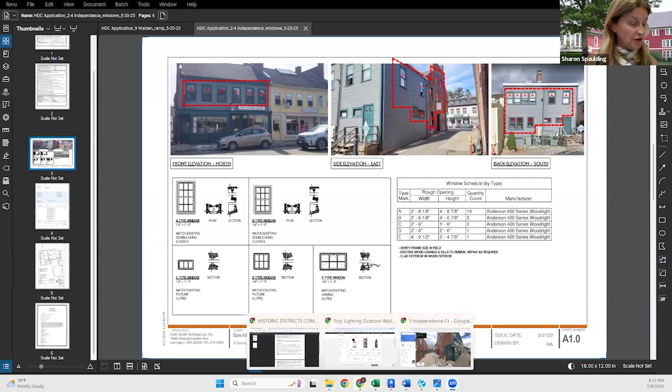In the winter, it's uncomfortable. Over the years, we've sort of done everything possible to repair these windows. We do feel like this is what we need to do. It was precipitated when the work at Vanderhoof's was approved by the commission, so we're following this scope and precedent that was set for them.

So I think from there, I will let Colin give any more details in regards to these. I guess the only thing I would add is that this would allow us to remove the storms, and then you'll be able to read the divided lights a lot better now on these new windows. So it's a full same size replacement. Correct, yeah, so it won't have that issue.

We have window people on the commission, I am not one of them, or at best one of their lesser members, but someone else feel free to pipe up. Usually, so what will go in there will have the same amount of light, same amount of glass space. It's not going to be reduced, or the replacement frame isn't going to be a different dimension or anything like that. Correct, it's not a frame within a frame.

Okay, same muntin width, and then we would like to remove this fat storm window frame here and the storm window itself. So it becomes a full removal of the complete window, replaced by 6 over 6. Yep.

Just to make sure I understood, so the outside framing, which is quite intriguing detail there, will remain. The casing and the sill will remain, correct. Thanks, yep, the sashes and the window frame will be replaced. So a reasonable person would never know the difference. Thank you.

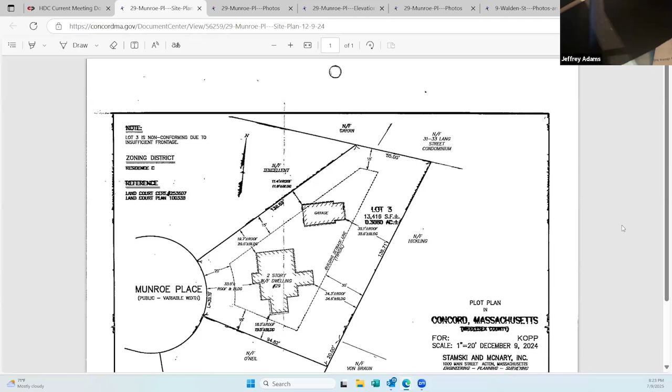Thank you. And nothing from Lang Street? No, not really. It's again very difficult to see, there's a great deal of foliage. I was there again today and I actually couldn't see Lang Street from the backyard. Yeah, you can't see it.

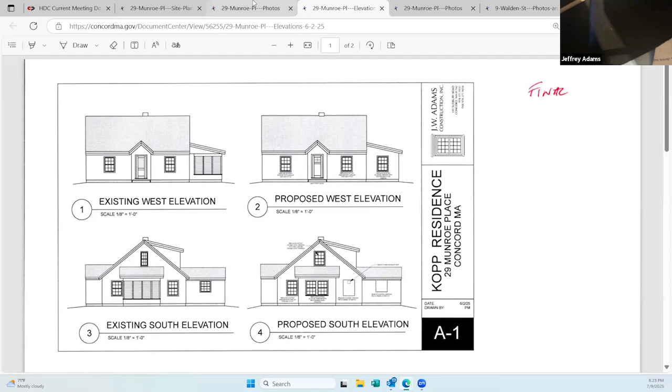So on the existing front or west elevation, the intention is to install a new door, and we've submitted the design of that, we can look at that in a minute. And to change the two existing front windows to the exact same size double hung Marvin windows that are wood sashes, very similar to the Anderson windows you just approved. These have a fiberglass type coating similar to the Anderson windows on the outside that's paintable, and that's our intention, to paint them trim color.

On the far right side, on the west elevation, we'd be removing all of the jalousie windows and putting in matching double hung windows. The exterior wood casing will be new wood and the sill will be new. Our intention is to remove the existing triple track aluminum storm windows on the existing double hungs.

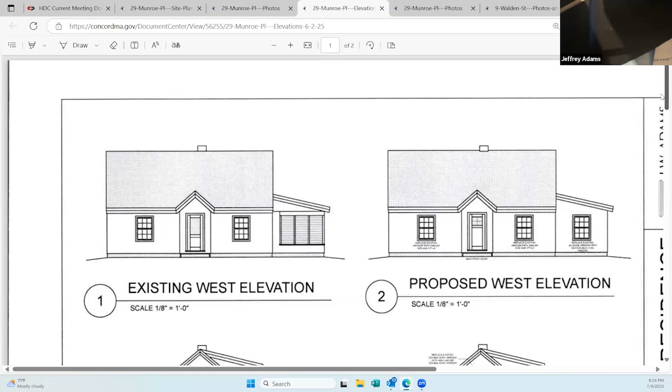If we scroll up a little bit and look at the right side of the house, or the south elevation, you can see the jalousie windows on that bump out on the left, and we'd be changing those to 2 double hungs. In addition, just to the left of that is an existing window, again to be changed to the exact same size double hung window.

On the right side, which is really not visible from the street, we would be eliminating a kitchen window. The kitchen is really quite small, there's only space for a counter on 2 sides, but it's very challenging to make it work with a cooktop and whatnot, so we'd be removing 1 window. Then in the back, there's a very small mechanical room, mudroom area, again not really visible from the street, and we'd be removing the window in that space to make it a more utilitarian space.

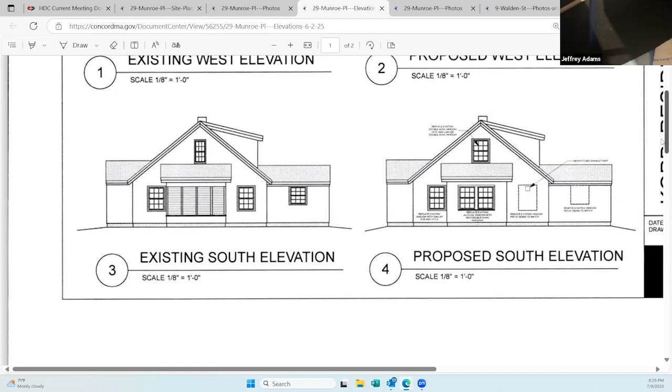If we scroll up to the rear elevation, the change here on the left is to remove the jalousie windows and door and install a conventional French door on this rear part of the house. On the rear dormer, we'd like to add a skylight above the staircase, which is an internal staircase without any natural light - again, that's not visible from the public way. We'd also be removing a window on the rear in the far lower right-hand corner, again to allow for a bathroom.

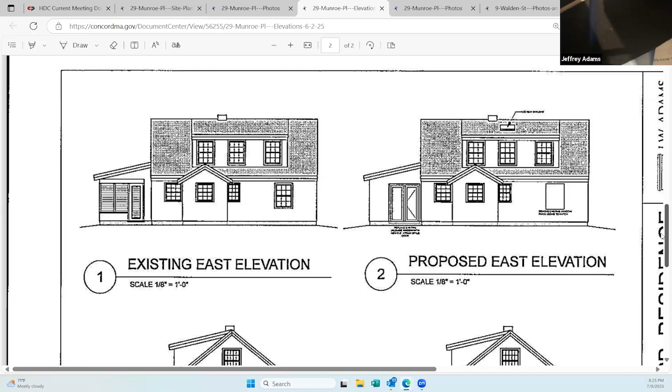Scrolling up a little bit to the driveway side, the change is to install a new door to the mudroom. It's the exact same 6-light door, but it's new, wood door. And on the right side, we'd like to remove the existing double hung window and replace it with 2 narrower double hung windows to match the glass size of all the other windows, but to allow for some headboard space in that bedroom.

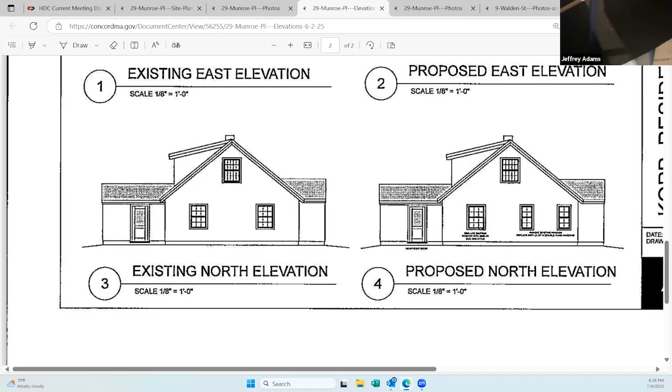So that's the crux of the changes. We've also submitted the paint colors, and we can offer any feedback about that or any other technical questions you might have. Thanks, Jeff, that was very comprehensive.

What are the paint colors? Yeah, that was my question. Okay, oh, that was - turn to that, excuse me. You're kind of doubling down on that blue, is that it? No.

Paula, while I pull that out, here they are. Yeah, I can offer some feedback and then talk more specifically about them.

The house color would be called Bruton White, a very light tan color. The trim would be Swiss Coffee, a cream color. The door would be Stardew, which doesn't look quite right on screen - it's a light blue, though currently it looks reddish, almost a red door on a blue house. It's colorful as it is.

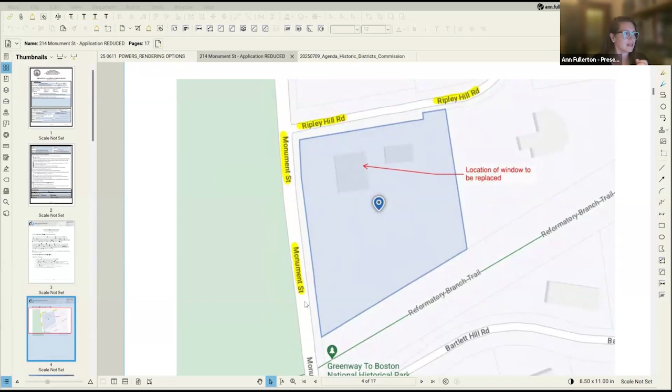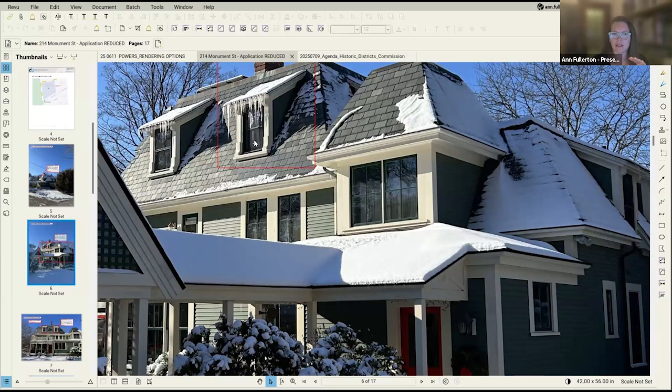To give you a bit more detail, this is the view entering their rear driveway. Most people enter from their front driveway; this is their private side driveway. So it's this window tucked back behind this stairway mansard roof. Here's another view of it. The window next to it is actually a historic window, so this Harvey one is the only one of issue. If we can answer any questions, we'd be happy to.

Sure, thank you. Actually, I remember this application and the Harvey window being singled out the first time. It's great that even for this one you're going with the proper Bostonian windows because those really look good, and I appreciate the Hokes working on the original windows. Just out of curiosity, any idea why that one needed to be replaced? Was it an earlier roofing issue or something like that?

It was prior to their ownership, so we really have no idea. They bought the home around 2003, and it was there when they purchased it. It was a cannonball from the North Bridge battle. Oh, that was it, went right through. Yeah, I just didn't know if it was a roofing repair issue we should know about or anything like that. But any questions from the commission?

No, seems straightforward. Okay, for public comment, any neighbors or passersby? Questions, thoughts, comments? No, okay. Back to the commission.

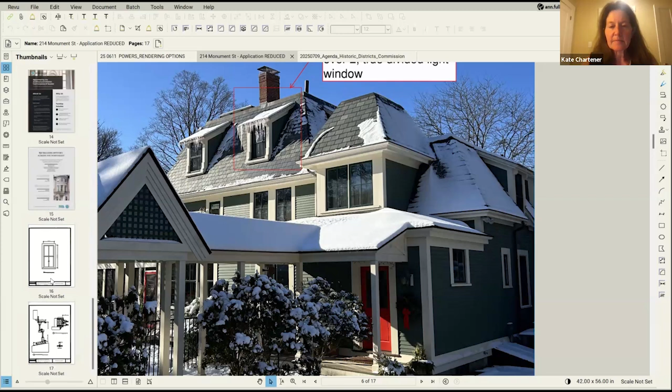Does anyone want to see, do we have a cut sheet of this window? Does anyone feel the need to see that? We do have a cut sheet that was part of your package. The muntin is approximately the same style and size as the originals, as close as possible as we can get. This section isn't specifically for our project; it's the proper Bostonians' typical section, which frankly this window type is used a lot in Beacon Hill. So this is a masonry installation detail.

What is of note is that we will be putting in two new sashes and really just the jamb liners. The rest of the window frame will remain in situ. The Harvey window was a replacement, so we don't have to touch anything from the exterior; we just have to pop it back out and use the original frame. The original frame, or the Harvey frame? The original frame, because the Harvey frame was a replacement window, so it had the filler frames on it. Right.

All right, thank you for that detail. Anyone, any other questions, or are we ready for a motion?

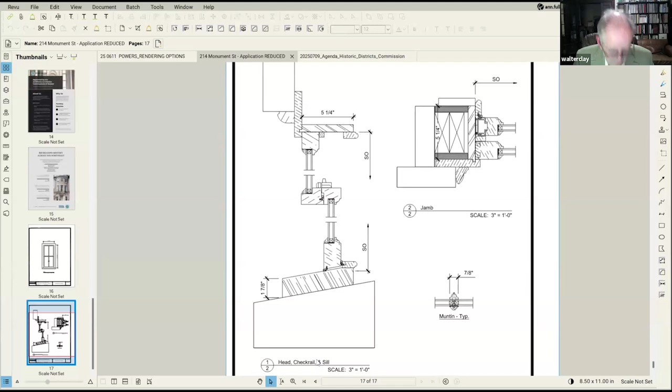May I have a second? Second. Thanks, Walter. Melinda, aye. Bill, aye. Lewis, aye. Walter, aye. And I am an aye to approve the window replacement at 214 Monument Street.

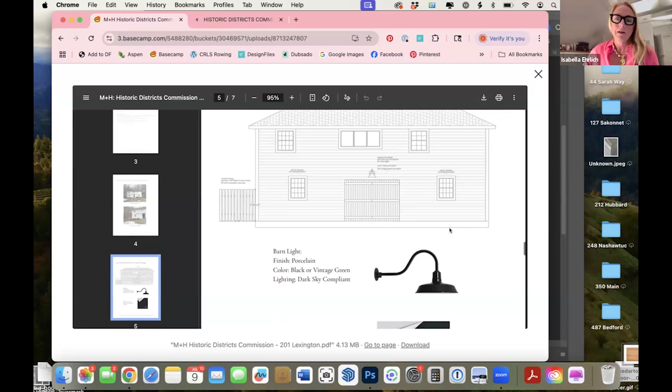Here you can see the piece of privacy fence that we would be building, custom-made to be as innocuous as possible, and adding a light over the doors, either in black or dark green. I like these lights because they're dark sky compliant, they don't shed light laterally, only downward, for accessibility and safety. We have two options, either black or green, depending on the commission's preference.

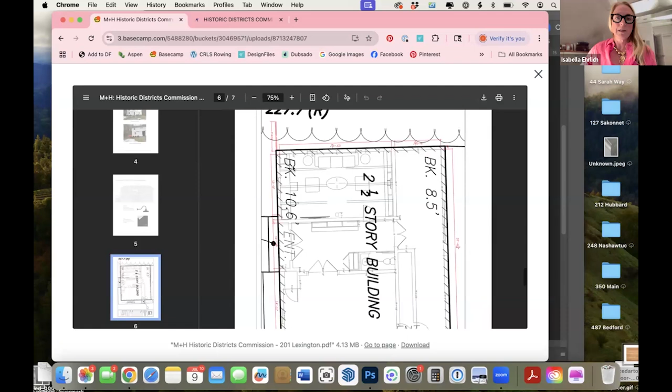So you can see in this section, let me zoom out a little bit. This is the front, the barn doors, and this is the piece of fence, and it is 5 feet.

So I will now show you a mock-up, very close in. We had proposed either natural cedar, or we can do it in a dark green. That would be a piece of fence, very similar.

The only intention is to hide the mechanicals and the garbage cans that are over here. I have mocked it up here in natural cedar from the public way, and as you can see, it's very hard to notice it. I tried to brighten it up just to make it more visible in the mock-up. But that's the piece of fence that would cover the garbage cans and the condensers.

Two options based on the commission's preference, either dark green or natural cedar. We don't have a preference. And then the addition of the barn light at the top, removing the floodlight, which could also be black to coordinate with the oil rubbed bronze hardware, or dark green, depending on the commission's preference. And that's all of it.

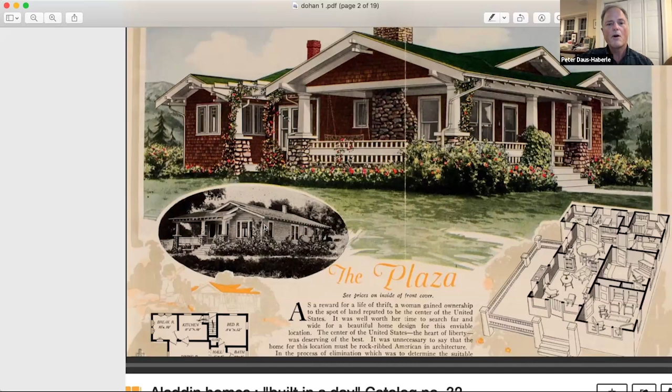What's there now has been replaced over many times over. It's got off the shelf Brosco moldings on the corners and band molding on top. This original house was available in either cedar shingles or clapboard, as you can see in this picture here.

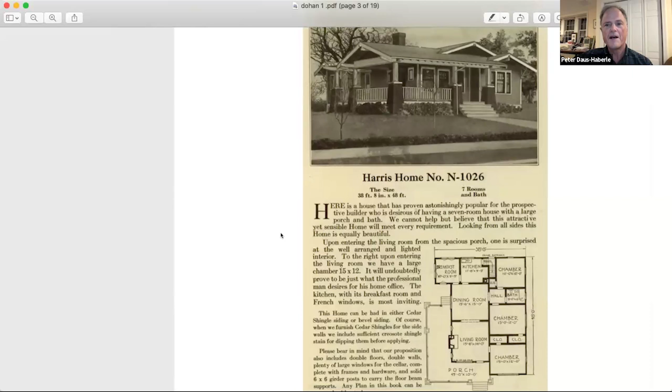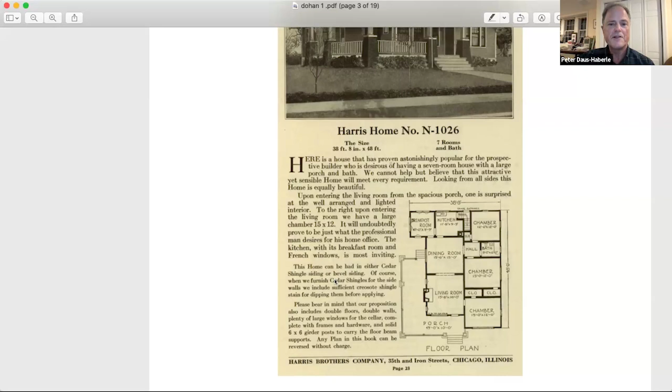So if we scroll down, we find some really interesting things. This is another ad from this house, original ad for this house. And we can see down here, it says this house can be had in either cedar shingle siding or bevel siding. So that's very interesting. This one shows brick bases under the columns.

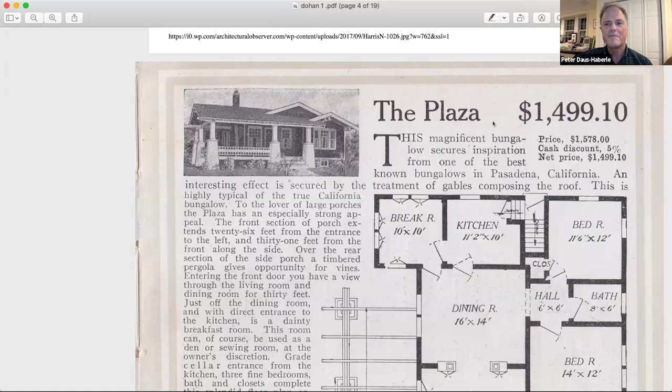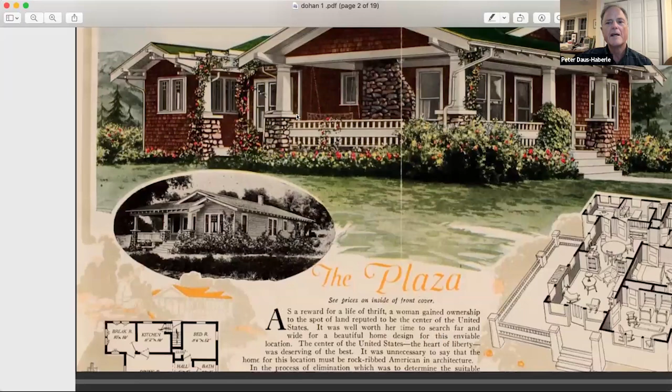And then we scroll down even further, and I think this is the funniest one. You see the price of that house back in the day - $1,400 or $1,500. The original details of the railings are still there. So many things that we can go back to are still on the house, which is very exciting.

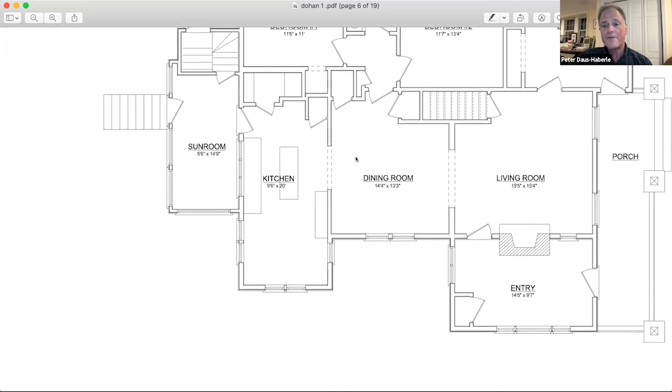But being faithful to the house, really, keeping the living room in the same location, keeping the study in the same location. A big thing for us is going to be to open up the original porch, take off that addition that was done in the 70s and open that back up. And then an expansion on the kitchen a little bit here, and then a back porch here to overlook the backyard, which is beautiful back there because it overlooks wetlands.

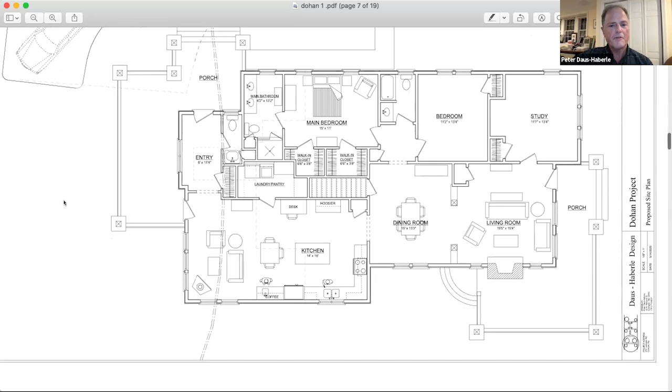I'll scroll back to this picture. I apologize about zooming in and out, it's a little disorienting, but - is Lexington Road at the top of the plan? That's a good question. Lexington Road is right along here. Oh, got it. Okay. Yes, so this is the front of the house. I'm sorry, I went a little bit quick.

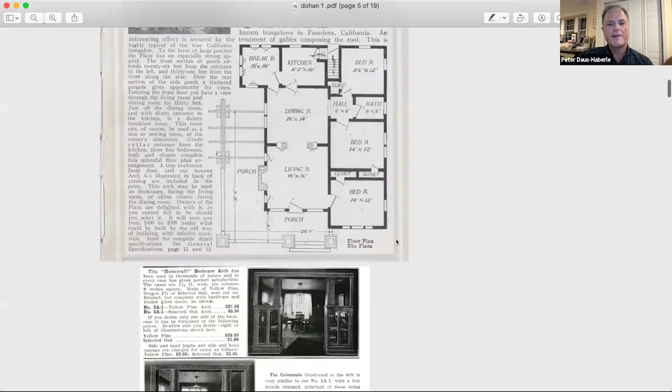This is the front porch right now. Right now, this section of the porch is enclosed, and that's what we're going to open back up. And let me scroll back up to that picture again. I apologize about all this scrolling, sometimes it's disorienting. This is the section of the porch that was open and is enclosed now.

And what they did was they moved the original front door from here over to here, and they closed this section, and they're calling it the entry, which it's not, it's the porch. And then they separated these two windows here, and then they put another door in this section here, which goes into what was originally a bedroom. So it's a little bit haphazard.

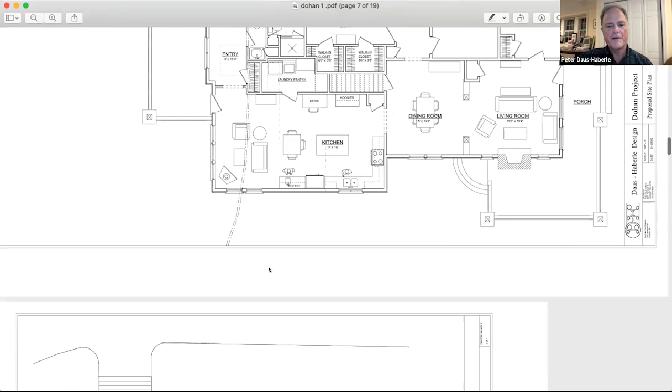So this is a big Andersen casement window, a big Andersen window there, big picture window. So this is the original open porch, which would look like. So let me scroll down to the elevations here. I'm sorry, just to sequence things.

So from public ways, 3 sides are visible, but not the back. Is that accurate? That is correct. Yes, thank you. So from a public way, this side is visible, the front is visible, and this side is visible, and then the garage in the back.

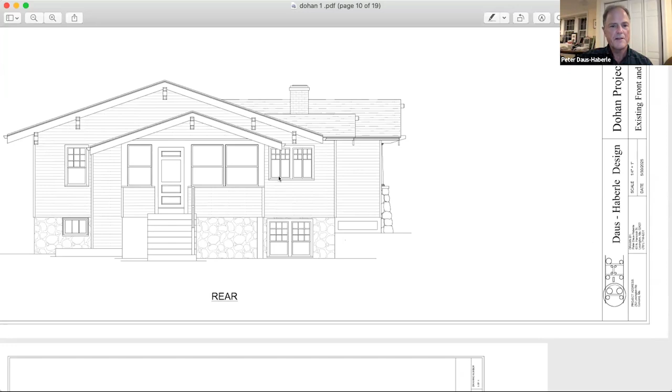This is the existing back of the building, which is not terribly pertinent to us, but this was an open porch and that was enclosed, and so we're going to put an open porch on the back again.

Would anybody like that? Or sure. Yeah, I just okay.

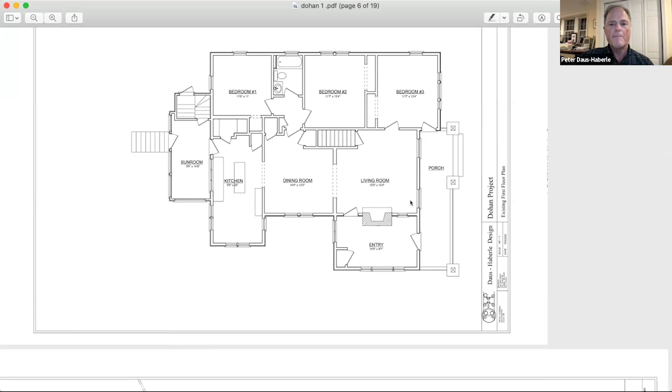So this, I'll go to the original floor plan. So right now this is the enclosed porch, which they are calling the entry, and they had moved the front door from here over to here and split these two windows. So what we're going to do is open this porch back up and then make a

better entry into the back. So there'll be a side porch, a side entry here into an entry in the back, because most of the time people will be driving into the driveway, coming from the garage and into the house this way. And then an open porch so they can look out their backyard, and then an entry that comes here, sort of like a mudroom entry into the kitchen.

The dining room staying where it is, the living room staying where it is, the study is staying, and this bedroom staying. This bedroom gets expanded a little bit. Mm-hmm. So it is a pretty extensive

restoration, renovation. So part of the new back porch will be visible from Lexington. Yes, this portion of it would be visible. Right. Yes, you're correct about that.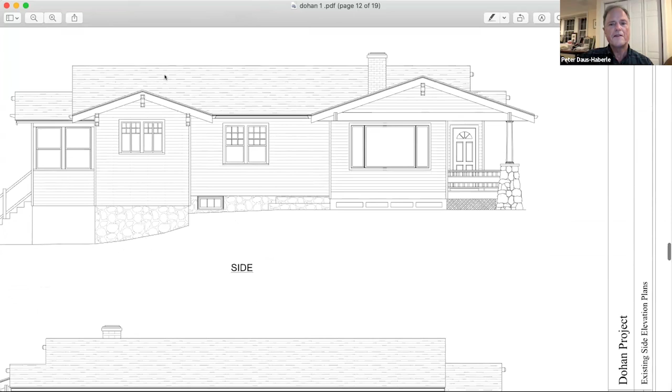So I'll scroll down a little bit further. This is the existing side elevation. We have this huge window here where they enclose the porch, this funky 1970s door that goes into that bedroom, just plain, not even muntin windows, and then just storm windows in the back for that enclosed porch.

And this is the other side, the driveway side, and I'll share some photographs with that as well. And this is a door down to the basement. The property slopes off a little bit here.

And then these are the proposed new side elevations. So we're going to open that porch up again. One of these columns has been removed, and we're going to restore that.

This is the existing foundation, and then we're going to drop down with siding in this area here, and then this is the porch off the back.

Now we purposely didn't do stone columns in the back. We thought about stone columns in the back, but part of the idea was to make this section of the house subjugate to the original house. You know what I'm saying? So that the most important part, what draws your eye, are the columns in the front of the house, the stone columns in the front of the house.

But we are going to go ahead and match the detail of the open rafters, the exposed rafter tails, these beams that come out, these beautiful little details here. We're looking to go from it now has like the standard K gutter, but originally the gutters would have been half round gutters. So we're going to go back with a half round gutter.

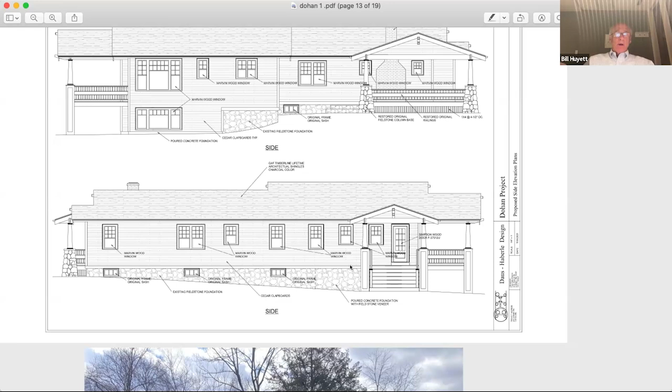Can you indicate with your cursor on that side view where the existing rear is, and how much are you adding? Right now the rear comes to about here, and the enclosed porch is right here. Then there are steps coming down, a big row of concrete steps.

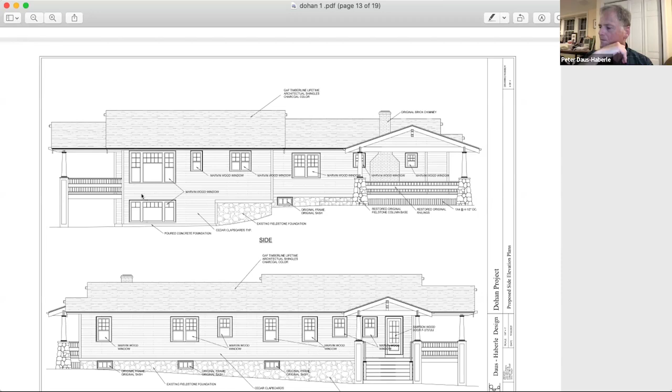We're adding roughly 300 square feet to the house. That number does include the porch. Part of that is that we're taking away some square footage by opening this porch back up and making it open, which balances with the addition of the back porch. So there's not a lot of added square feet right now.

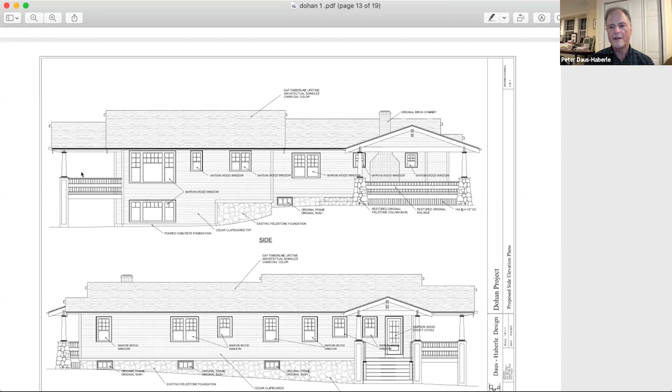The basement is unfinished, and in the new plan we're planning on finishing the basement, so there's a decent amount of additional living square feet there, about 600 additional square feet.

In addition, there's the garage that's back there right now, which I think was the original structure, then this was added here. This structure is in very poor shape and really needs to be torn down. It's also in the 50-foot setback of the wetlands, so we're proposing to build a new garage with the same square footage, pulling it out of that buffer zone.

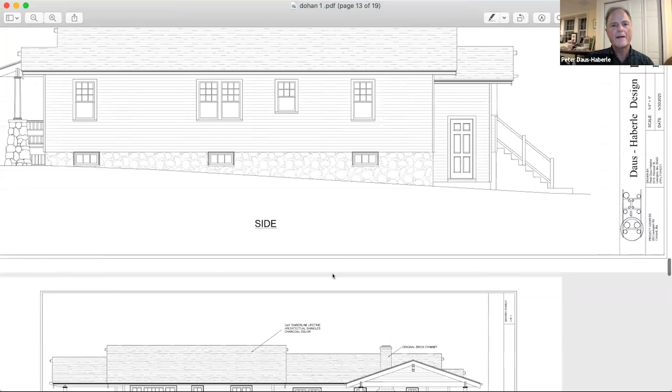When we do that, we're going to reduce the paved driveway. Depending on how things go tonight, we may need to put a stipulation. We're looking to put pervious pavers in this section, which is part of our presentation for wetlands. We realized we didn't present what type of pervious pavers we were looking for, so we could have a stipulation to come back for that if you'd like.

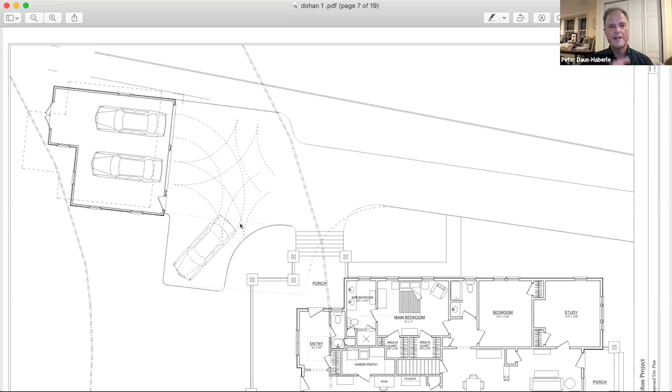Were there garages in that catalog as well? Oh, I would love that, you can build in a day. There were no garages, I was just wondering.

I'm going to stop this share and start a share that has a lot of the specifics on the materials. Do any of you have any other questions about this one?

So I guess I'm just generally curious about the design of the garage and how much of it is freewheeling and how much is inspired by... I saw you're going to great pains to restore the house. I was wondering if there was a sympathetic design for the garage that sprung from the same.

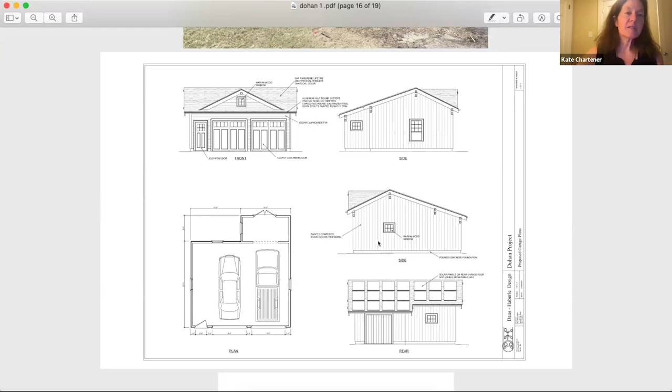Bungalows typically do. What we've done is taken a little bit of cues from the house. We're looking at doing the same sort of rafter details on the side, an open rafter, exposed rafter tails, the half round gutter. So we are trying to pay attention to the existing house, but still make it subjugate to the house and not fight it.

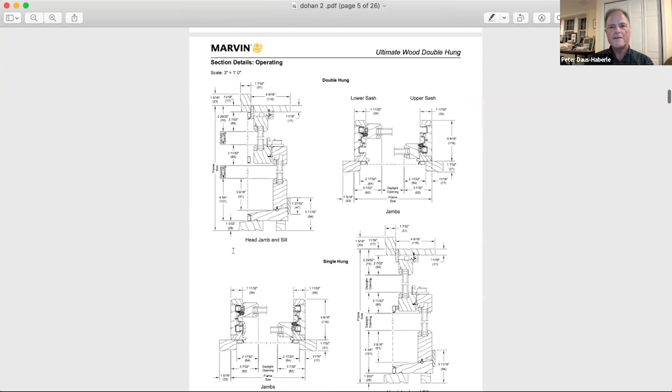This is a cut sheet for the Marvin windows. This is an all wood window that's painted on the exterior and painted on the interior as well. So that's for the Marvin windows.

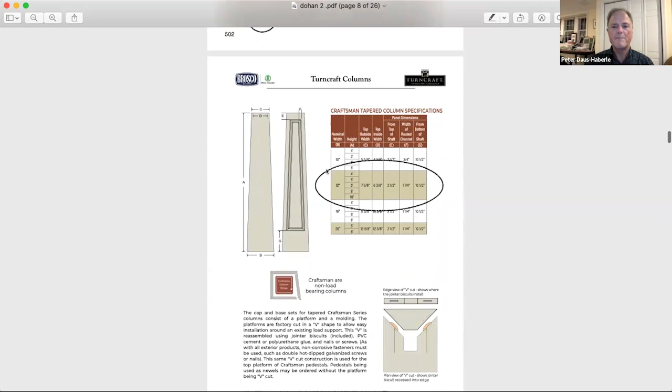For the columns, what we were looking for was to use this column from Turncraft Columns. It's a fiberglass column, but what you'd see from the outside would be painted, so the material you actually see is what would have been the original material, which is paint. The existing columns on the building are cobbled together with a bunch of off-the-shelf moldings. This one has the proper taper you can see in the original catalog illustration, and we'd use this top and base, which is more indicative of the original, as opposed to what's there now, which is just a piece of 1x and a piece of band molding. So this would bring it back to the original style.

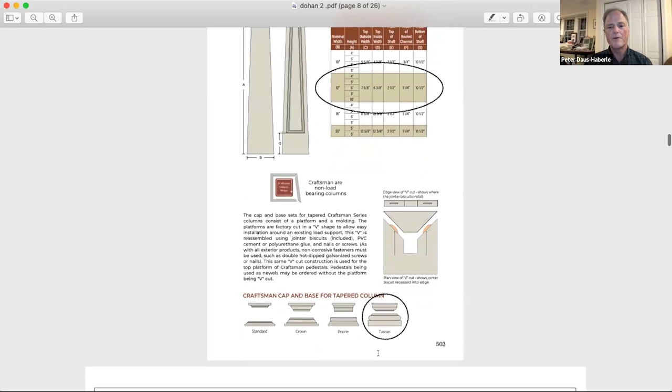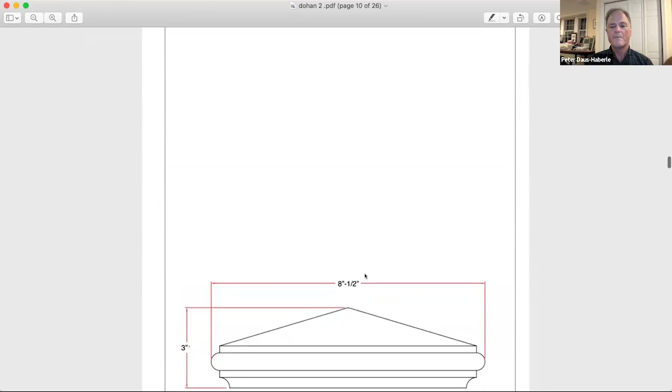For the back railings, we're going to use this cedar railing system. The balusters are bigger than 2x2, so we'll be using this system, which offers a bigger baluster, and then a wood cap as well.

These are the lights we would likely be using on the front porch up in the ceiling. Again, I was able to find lights from 1920, the era of this house, from the Sears catalog that looked just like this. So that was pretty satisfying.

Moving back to the garage - on lights, will they be dark sky compliant? Yes. Will those lights be visible from the outside, or are they up in the rafters? They're up in the ceiling. There's a flat ceiling to those porches, a beadboard ceiling, so you'd be able to see them if you crouched down.

As we move back to the garage, it would be preferable if we could use a fiberglass door just on the garage, because that is much more prone to weather, not being covered or anything. So this would be the door I'd propose for the garage. It's a fiberglass door made using this simulated divided light, called direct glaze, which means it has a lot of depth and doesn't have that extra look - it's made exactly like a wooden door.

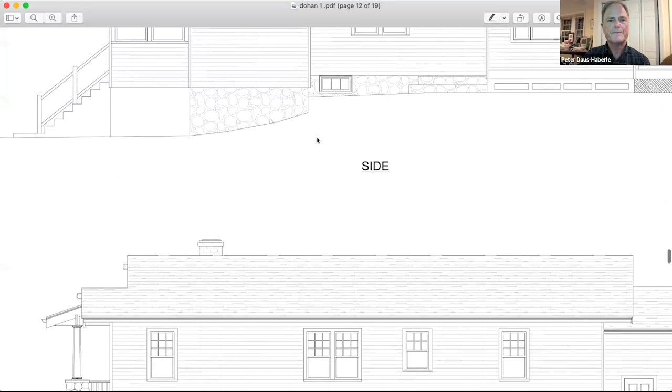Let me jump back to the other share, and I can answer your question. So I'm going to scroll up here. What I was proposing, just to keep it simple and clean, would be vertical 1x4s set at a 4.5 inch spacing - so basically you have about an inch between each vertical 1x4.

So all of these materials would be wood. The only sections that we're proposing to be painted PVC would be these column bases here, just because those tend to be rot-prone over time. Everything else would be painted wood.

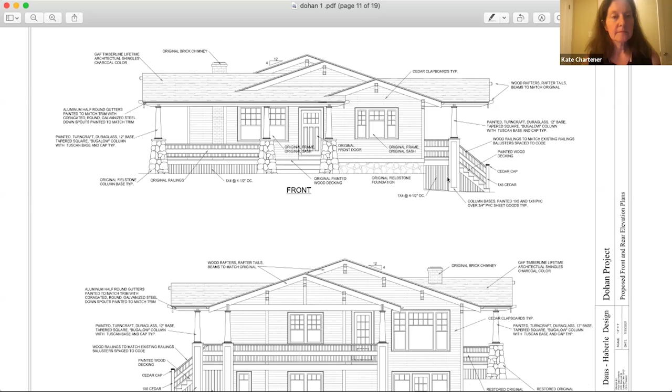I have a question - first, this is a very nicely done package. Thanks for taking the time to do the historic research and show it to us. Fascinating, and yeah, it's very, very nicely prepared. I may be taking a cue from Walter's comment - if you could go back to the garage elevation.

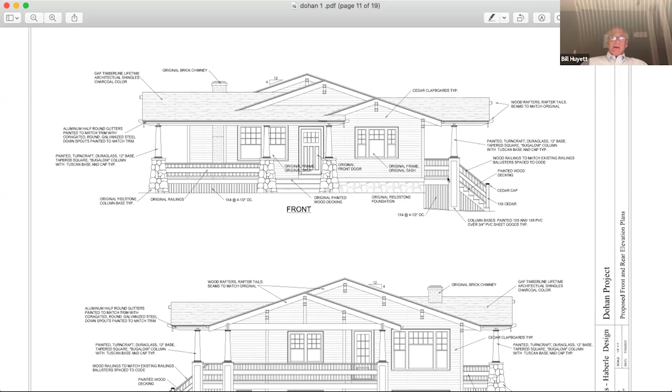I'm least qualified of any of my colleagues here on this, but I go from a garage that's about falling down, but therefore is quite subsidiary in the sense that you don't notice it, to this design, which you can't not notice. It's got bright doors, they're big, and it's the only thing in this package that doesn't quite feel historic, if you will. Again, I'm not an architect, but it almost seems like those doors are squeezed in, and I don't know if there's something that's not quite the same.

Well, it's the asymmetry of those two large doors with the roof line that's the issue. Yeah, that's a good point. I'm sorry, it's not a question, but it's a reaction.

At the risk of saying things you're not supposed to say, if you move the human door to the side there and center or balance the other two, it would take care of that - in terms of the historic presentation of this building, to make it look less out of place with the existing.

Yeah, it's interesting because the existing garage has the two doors squeezed to one side and a blank spot here, and maybe I was cueing off of that. But it's an entirely different roof line, totally different, realizing that. Who knows when this or how this was built? It could have been a poultry shack at one point.

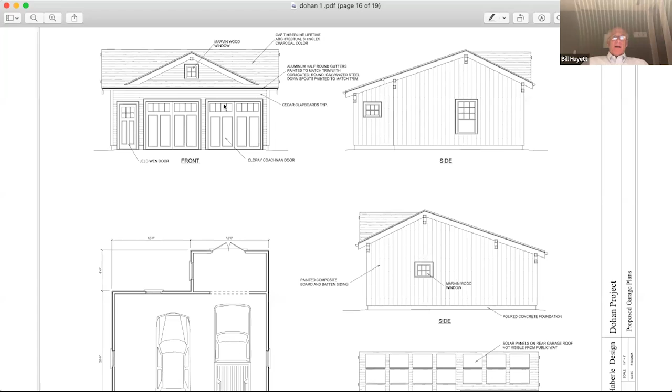I just wonder if that old roof line wouldn't be more appropriate - as a question, right, because maybe take this dormer off and just leave the roof simpler. Certainly worth looking at.

Or leave the roof line - again, we don't like to do this, but we offer ideas. Let's keep that roof line and move the human door around the corner.

Alex and Dave are obviously really looking forward to moving into the house, so we'd be very open to your decision on this, with the stipulation that the barn is not approved at this point, and that we would come back for that. That would work fine for us.

I believe the technical term is to de-ostentationize it. Yes, I like that. Oh, sorry Peter, did I miss this? You talked about - maybe this would be part of coming back on the garage barn - but about the paving surfaces?

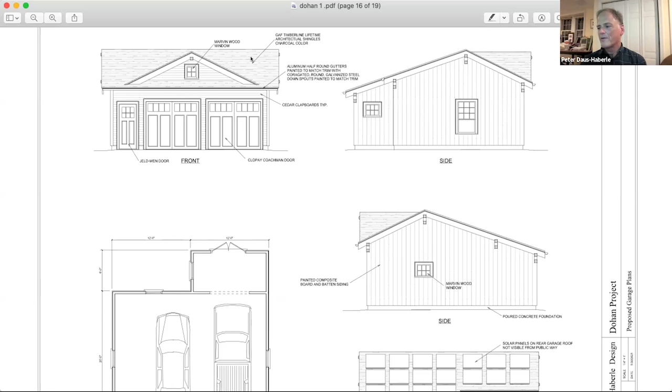Yes, so I realized after that first meeting held tonight that's going to be something we really want to take a look at. I had looked into pervious pavers - they make one called a Boston City Hall pervious paver. It's not a Boston City Hall brick paver, which would be really nice, but those aren't pervious, so we'd have to research an appropriate pervious surface back there. The reason we're looking at a pervious surface is to mitigate this building site next to the wetlands, so that's the only reason we're introducing this.

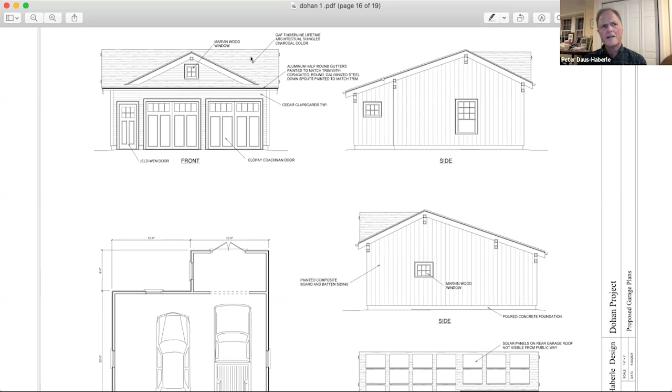Though I think it might be kind of nice to have a little less asphalt - I'm scrolling up to the site plan. If you walk off the side porch back to the garage, it might be nice - this was planned to be a pervious surface. It would be kind of nice if this was more of a pathway back, so brick might be appropriate.

But to your point, I don't have a specific paver to present in the meeting tonight. I realized that was an oversight when we sat through the first hearing. Because we do care. Yes, absolutely.

Let's see, are there any other questions? Does anyone feel the need for a site visit?

Well, I sort of do, because I'd really like to see the building. We usually do have them to some degree if demolition is involved. It was a very comprehensive package, but usually if there's some demolition involved, we just like to see it.

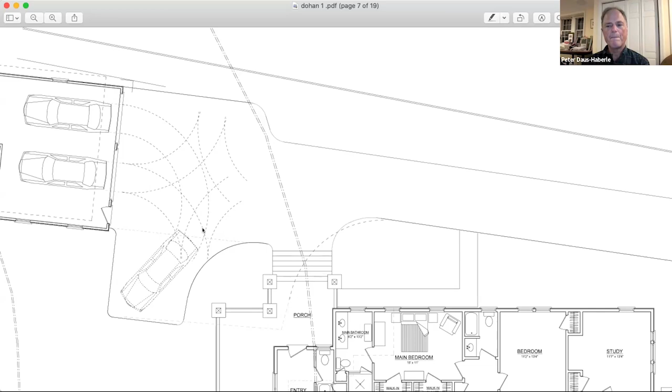So if we had a site visit, it would be the morning of the next meeting, which would be July 30th. Just to be clear, Kate, I don't think it's necessary.

You don't feel any need? No, for me it's just selfish - I'd love to see it. Well, actually, you're certainly welcome to be there when we get started. I would love to walk you through it.

We don't need to be there now anyway, because I think our bigger concern is just to see where the garage is, and that's going to get revisited anyway later. If we're partitioning this into the house and then the barn plus the drive, we can take a motion on the house and have a site visit in conjunction with the discussion of the barn and the pavers. Yeah, I think that's the way to go.

All right, any other questions? Anything else anyone wants to zoom in on from the commission? Okay, I'll open it to public comment. Would anyone care to comment on this project? No. Okay, back to the commission.

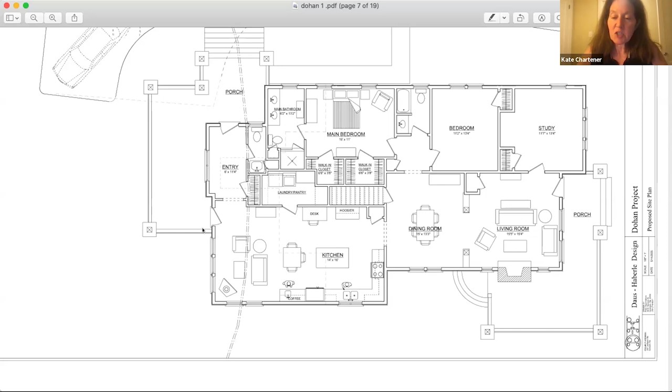Would somebody care to make a motion? I'll make a motion that we approve the house portion of the submission, and if this is technically correct, continue for further discussion of the design of the barn and the driveway layout and materials.

Hold that thought, because we do have a raised hand from Ermengarde Doan. Hi, I'm sorry, I wasn't quick enough. I am the immediate abutter to the west, and I have a couple of questions regarding the garage - how much closer to the house will it be?

It's about 5 feet that we need to move it forward so that it goes out of the buffer zone, and it'll be a little bit further away from your house. It needs to be shifted towards their house so that we have the proper setback. Right now it's non-conforming. We're going to bring it into conformance by moving it closer to the house.

We can visit that some more at the next meeting, because we're going to be revisiting the garage. Right, yeah, that was my question, because I know there is a specific amount of space that has to be between.

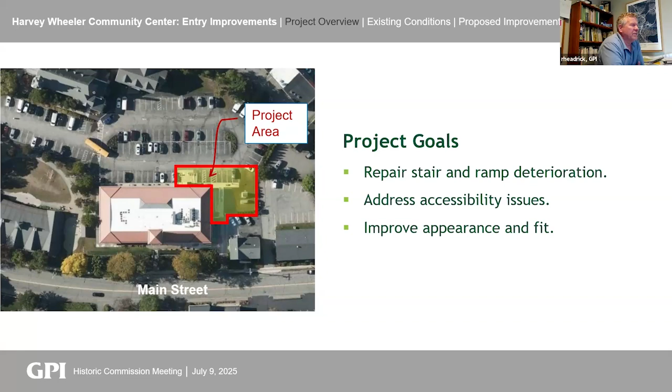We're also looking to address some accessibility issues and code compliance. There's a set of stairs that no longer meets code, and we have a clearance issue on the handicap ramp that goes down to the basement level. Part of what we're trying to do is just improve the overall appearance and fit of the work, because in 2002 they really weren't looking to make it match the building too much - it's basically concrete and pipe railings.

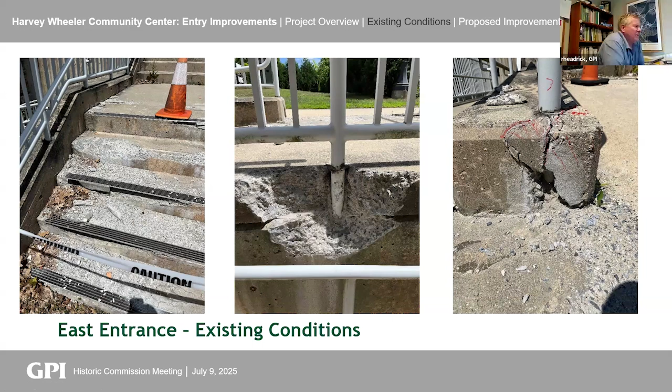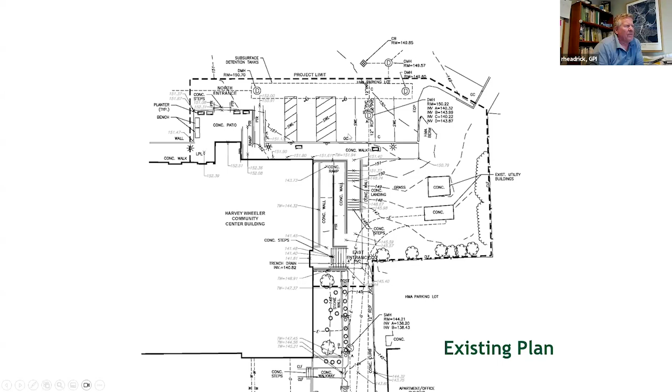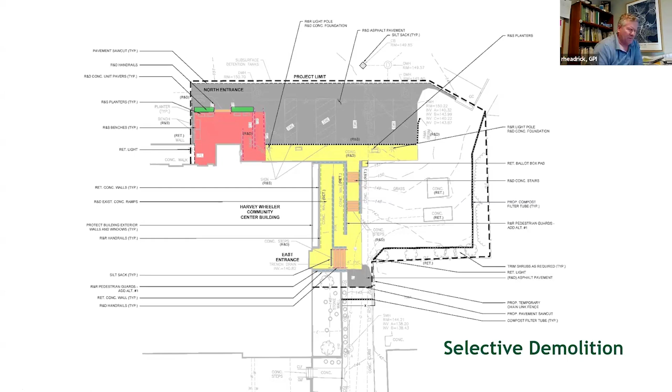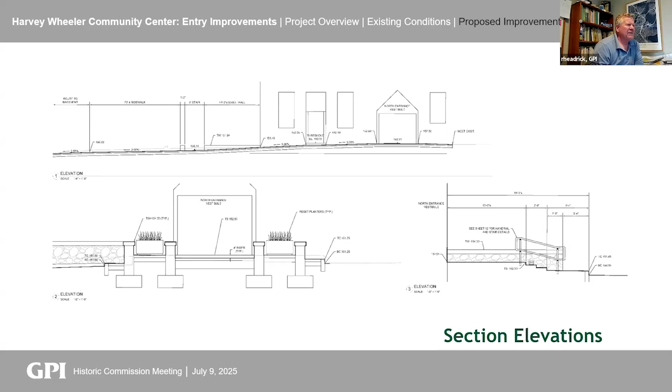And then finally, materials. As I've mentioned, the curbing out there is granite, typical granite curbing, which holds up very well to our New England winters. The guards and rails are all this white painted aluminum, as is the case all around the building. All was done at the same time.

We'll be looking to reuse some of these railings where we can, basically remove them and reset them once the repair work is done. In some places, we're going to discard some of them because either they're being used and can't be reused, or we'll be adding new ones for the new staircases, but they'll be made to match.

And the stone is not something we just made up. It is actually quite predominant out there. The whole elevation along Main Street has a wall, and it does turn up along the eastern edge of the building. So we thought pulling it around to the back entrance would tie it all together a bit. Based on what we've seen, I think the back of the building at one point was probably the playground space, and over the years the parking got added as well as these entrance improvements.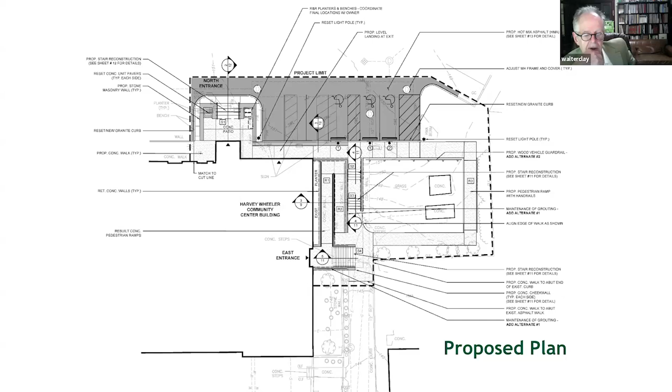Anyone else share that position? That's pretty much my take on it too. Me too. Blinded by science.

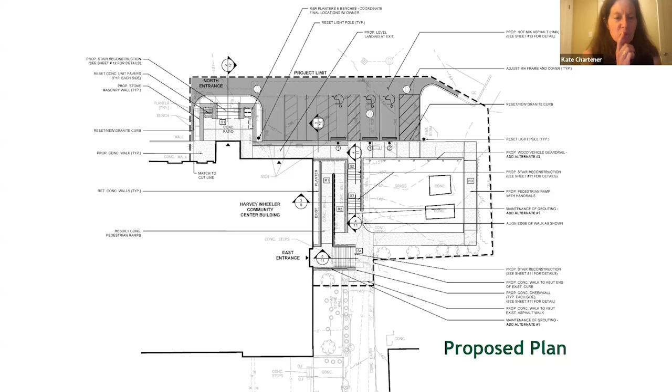Yeah, I was. The aesthetic question was, should the guardrails be white, or should they be gray, or should they be white? I could only come up with the guardrails, and then oh wait, I did have one question, and you probably answered this.

The stone wall that you showed near the end, one was capped with a granite, and one is not. Which is which? The one on the left is existing, and you can see it's quite dirty, it's got lichen on it, you know how walls get. Well, we're historic preservation, we don't have a problem with dirty and lichen. Yeah, so it's been there a long time.

The one on the right I was looking for kind of a more rounded type of stone wall, and I thought that was a pretty close approximation of it. And it does have a granite or a slate, I can't quite tell, but we are proposing a granite cap on it, partly because it can be used as a seat wall for people sitting outside. The problem with a wall like this is it constantly gets water down into the joints, so over time the mortar starts to fail on the top layer and it works its way down. So that's why we would propose that.

And I guess I would say, in terms of all the things we're doing, the only thing that's not really just a repair is the addition of the stone wall with the granite cap, and probably the granite treads. Everything else is pretty much a repair in kind of the materials that are out there.